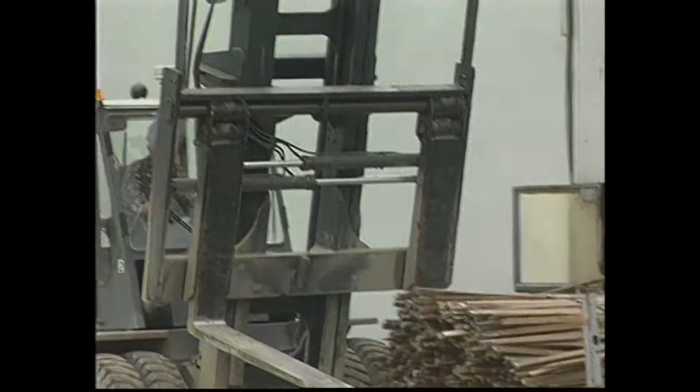Lift truck operators are just like millions of other professionals who earn their living by operating equipment or vehicles. It takes skill, training, and experience, realizing that no job on the ground or in the air can be done at the expense of safety.

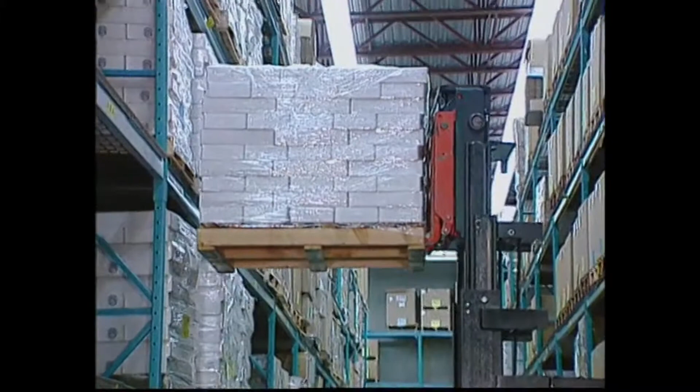Remember, you're working on a piece of machinery that weighs about 9,000 pounds. With a load, it increases up to 14,000 pounds. That's equivalent to 6 cars. Lift truck operators have a difficult job. They lift heavy loads and they maneuver in tight spaces.

Safety isn't something anyone sets out to ignore, but tight schedules, heavy equipment, pedestrian traffic, and congested workspace can compromise safety any hour, any minute, any time. Unfortunately, accidents can happen, but accidents happen more and cost more than we realize.

Between lost time, increased insurance premiums, and litigation, it's common for accidents to cost a company over $1 million. Some companies cannot survive the aftermath and close their doors permanently. Then there is personal injury. Let's not forget the family, especially the children. One accident can cost a child a lifetime of happy memories.

But we can improve safety with the right training and the right rules. Government studies have shown effective training programs improve lift truck operators' safety performance by as much as 70%. OSHA, the Occupational Safety and Health Administration, estimates that there are 68,000 accidents every year in the U.S. involving lift trucks. Of those, over 100 people are killed.

Here's how the accidents break down in terms of causes. 25.3% tip over. 18.8% personnel are struck by a powered industrial truck. 14.4% personnel are struck by a falling load. 12.2% employee falls off elevated forks. 7% the lift truck runs off a loading dock or other surface. And 6.1% the lift truck is improperly maintained.

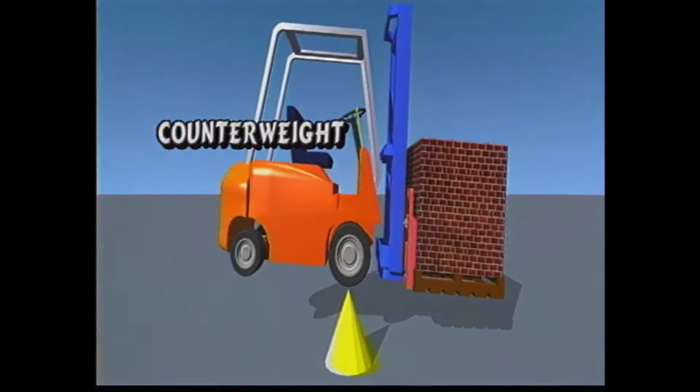The heavy counterweight on the back keeps the rear wheels on the ground. As you can see from this diagram, the front wheels act as a fulcrum between the counterweight and the load, just like the pivot point of a teeter-totter. It's the same principle of leverage that allows a young child to lift her mother.

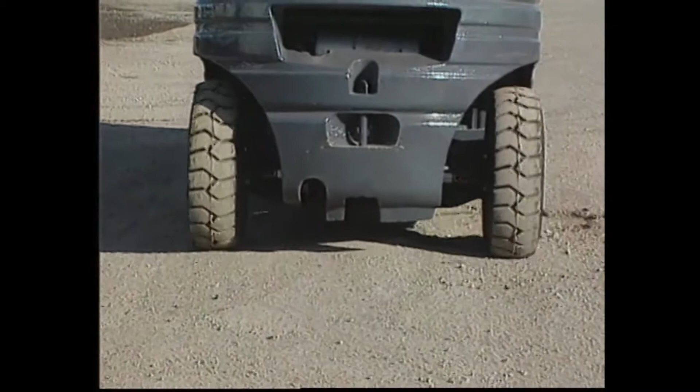A typical counterbalance lift truck has a three-point suspension system. The rear axle pivots at a single point in the center of the axle to compensate for uneven floors. This forms the stability triangle base. With the added dimensions of lift height, it forms a three-dimensional triangle similar to a pyramid.

When the combined center of gravity stays within the triangle, the truck is stable. Move the center of gravity forward of the triangle, as when a load is too heavy or too high, the truck will tip forward. This is called longitudinal stability.

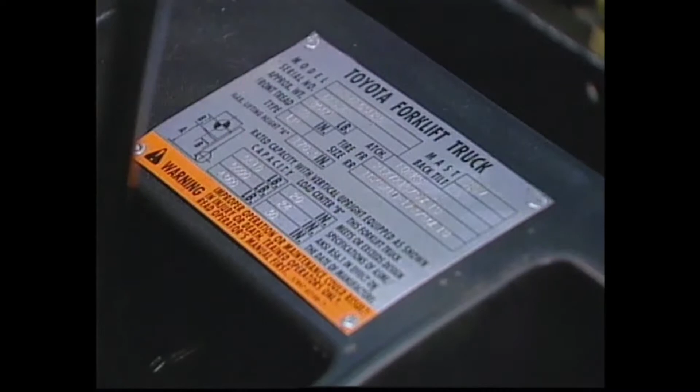Now, a truck must have a nameplate. This shows the maximum weight it is allowed to lift. This truck can lift 5,000 pounds, based on the load having a 24-inch load center. The load center is the distance from the face of the forks to the center of gravity of the load.

In this example, this 5,000-pound truck with a 24-inch load center will attempt to lift this 5,000-pound load. However, because of the unusual shape of the load, the center of gravity of the load is 30 inches from the face of the forks. Notice how the rear wheels lift off the ground when the capacity of the truck is exceeded.

Now, if the truck lifts the load from the opposite side, the center of gravity of the load is only 18 inches from the face of the forks. This load can now be safely lifted. The nameplate will also show the maximum lifting height. The higher the lift, the lower the capacity.

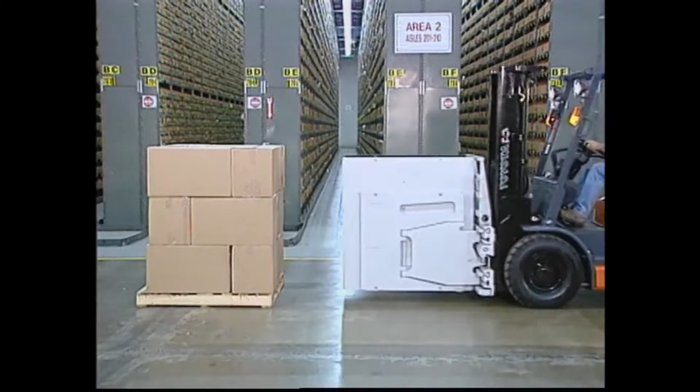Attachments such as this carton clamp actually reduce the capacity in two ways. First, the carton clamp moves the load away from the operator, reducing load capacity. Secondly, the weight of the clamp will further reduce load capacity. This 4,000-pound truck will now be rated or limited to lifting a load of 2,500 pounds or less.

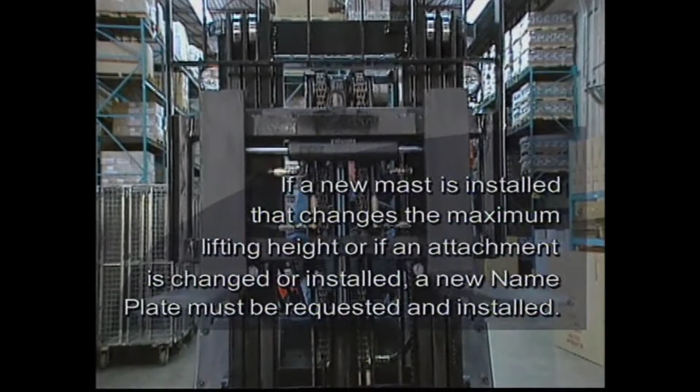If a new mast is installed that changes the maximum lifting height, or if an attachment is changed or installed, a new nameplate must be requested and installed. Over 1/4 of all lift truck fatalities occur when a lift truck tips over. Understanding the principle of lateral stability will reduce the chance of your truck falling sideways.

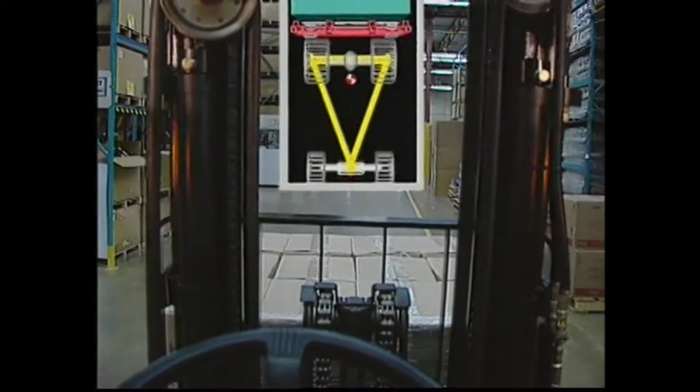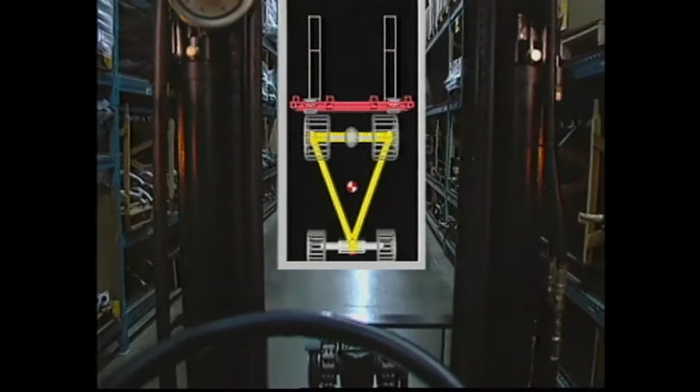What do you think? Is a lift truck more stable with a load or without a load while turning? As this lift truck turns with a load, the combined center of gravity moves towards the edge of the triangle. Now, notice what happens when we complete a similar turn, this time without a load. Notice the center of gravity is much closer to the edge of the triangle. The closer it is, the less it takes for the truck to become unbalanced and tip over. This is why an unloaded truck should be operated just as carefully while cornering.

Let's look at some causes of tip-overs. Sharp turns, raised masts, unstable loads, potholes, uneven surfaces, wet surfaces, and driving on ramps, to name a few. On October 17, 1994, Scott was operating a lift truck outside. He was attempting to pick up a load of empty pallets. While making a sharp turn, he hit a small pothole.

Scott was fortunate. He had been properly trained. He knew how to best survive a tip-over situation. First of all, Scott was wearing a seatbelt. When the lift truck tipped, he stayed inside the operator compartment, his best chance for survival. He braced his feet and held on tight to the steering wheel with both hands while leaning in the opposite direction of the fall. Scott was able to escape with minor injuries.

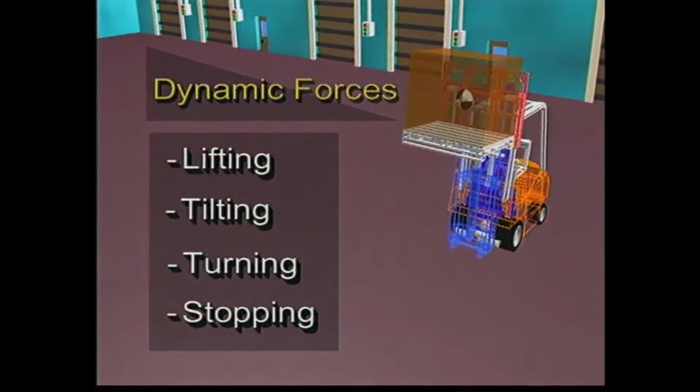Never attempt to jump out of your lift truck if you encounter a tip-over. Had Scott tried to jump clear of the truck, the overhead guard would have struck him, crushing him to death. When a lift truck is in motion, the dynamic forces such as lifting, tilting, turning, and stopping can cause the combined center of gravity to move outside the stability triangle, causing the lift truck to tip over.

When operating a Class 1 stand-up lift truck, operators must be aware of the causes that result in a tip-over situation. These are overloading, traveling with elevated loads, braking or accelerating sharply while turning, handling off-center loads, traveling at excessive speeds, falling from docks, dock plates, and trucks and trailers, to name a few.

With a counterbalance lift truck, the operator is instructed to stay with the truck when it tips over. Stand-up lift trucks are different. In the event your stand-up lift truck is involved in a tip-over or off-the-dock accident, you can be severely injured or killed. To minimize your risk of injury, it is recommended that you step off the rear of and away from your stand-up truck. Safety authorities such as OSHA state, when a stand-up rider tips over laterally, the operator must be trained to step off the vehicle toward the rear of the vehicle.

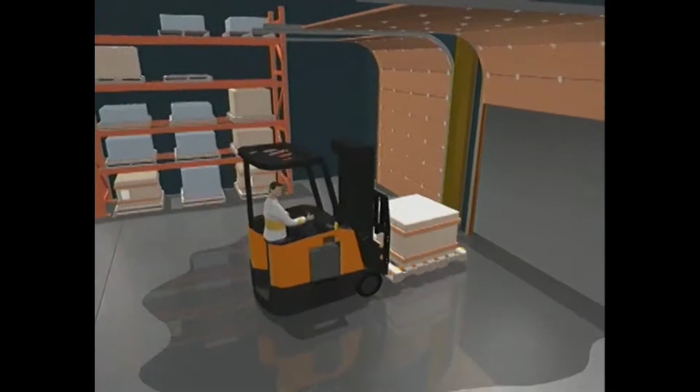In this example, the truck is turning a corner too fast with the load raised. As the truck begins to tip, the operator senses this emergency situation and steps out of the operator compartment. In this next situation, the truck is approaching the loading dock too quickly and slides on a wet surface. Unable to stop, the truck continues over the edge. The operator senses this emergency situation and steps out of the operator compartment.

Use slow and gentle maneuvers when operating a lift truck. This will keep the combined center of gravity inside the stability triangle and all of your wheels on the ground. Keep your balance. Your life depends on it.

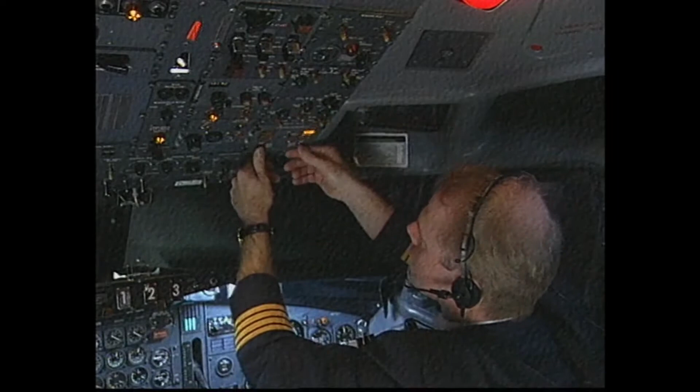When you put your life in the hands of professionals, you do not want them to cut corners. Pilots, for example, use a checklist to do a pre-flight inspection before every flight. 99 times out of 100, everything checks out okay. But it is the pre-flight inspection that contributes greatly to safe air travel.

It's the operator's responsibility to inspect the lift truck before the beginning of each shift and keep a written record. At times, this task may seem unimportant. However, 6.1% of accidents are caused by improper maintenance procedures. The objective of the inspection is to look for damage and to make sure the truck is in safe operating condition and meets the manufacturer's specifications.

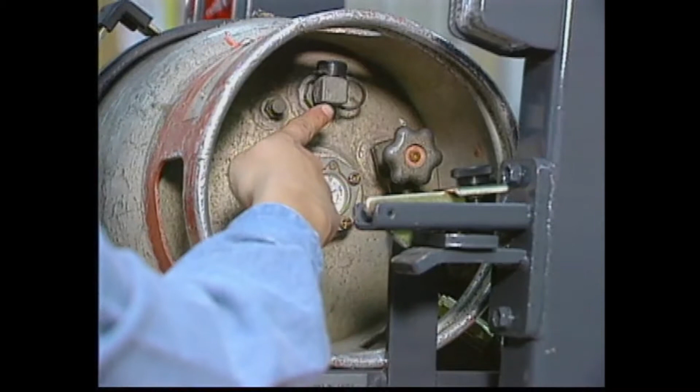A good place to begin an inspection is at the fuel source. In the case of an electric truck, start at the battery. With a propane truck, begin with the liquid propane cylinder. Make sure the locating pin is in place and the pressure relief valve is pointing upwards. Check the fuel level. Don't take a chance on running out where it is dangerous to refuel.

Check the connectors and hoses. Then listen, smell, and look for leaks. Frosting will indicate even the smallest leak. Be careful. Touching this with your bare hands can cause a serious frost burn. Check the cylinder tie-down latches to make sure the propane cylinder is secure.

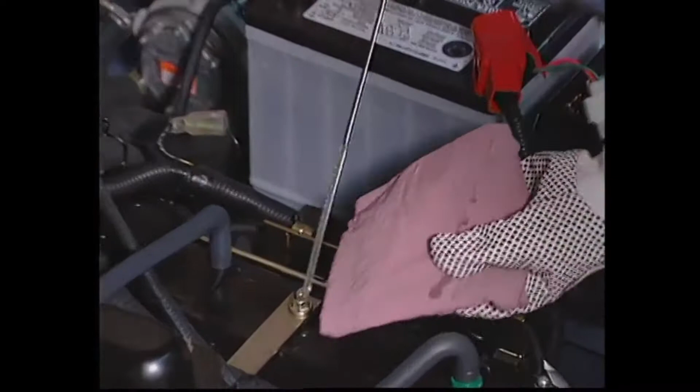Open up the engine cover and inspect the engine compartment and fluid levels. Check the battery, the engine oil, transmission fluid, the fan belts and hoses. It's important that they are not frayed or worn.

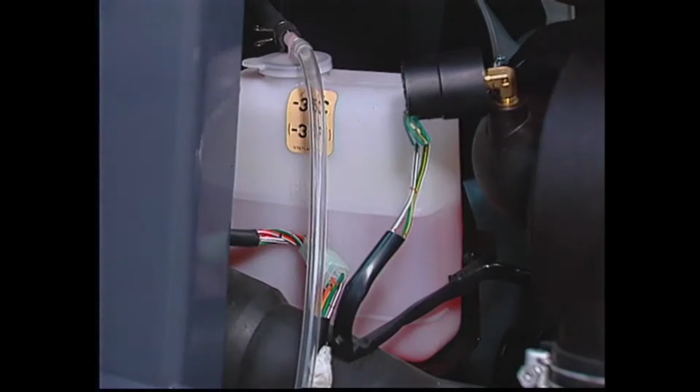Check the brake fluid reservoir, hydraulic oil level, the radiator coolant, and finally, inspect the air filter. A dirty filter can increase harmful or poisonous exhaust gases. Close the engine cover and secure the propane cylinder.

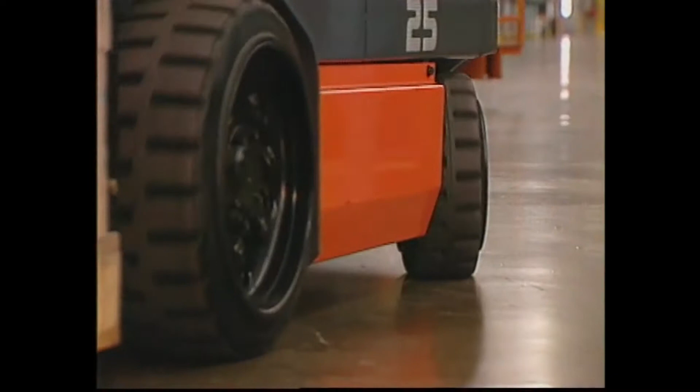Next, inspect the tires and wheels on the right side of the truck. Ensure the overhead guard is in good shape. Are the lug bolts present and tight to the touch? If not, call for repairs. Loose or missing lug bolts can cause damage to the truck or injure someone. Remember, do not operate the lift truck until repairs are made.

Are there chunks of tire missing? Cuts or objects embedded in the tires? How about wire, plastic strapping, string or foreign objects lodged in behind the wheel? These can cause costly damage or serious injury.

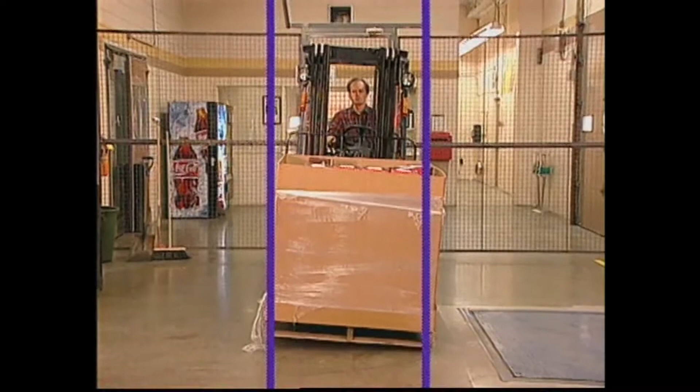If you're inspecting a truck with pneumatic tires, check the air pressure as outlined in the operator's manual. An underinflated tire will lean the truck to one side and will decrease stability. Notice that when the load is being lifted, it is actually moving away from the center of the truck. It wouldn't take too much to tip this truck over.

Examine the mast and forks. The forks must be level. Look for excessive wear or cracks in the hanger welding or in the heel. The forks must be evenly spaced and the fork pins locked into place. Equal tension in the lift chains is important. This will prevent uneven lifting. Verify that the chain is well lubricated.

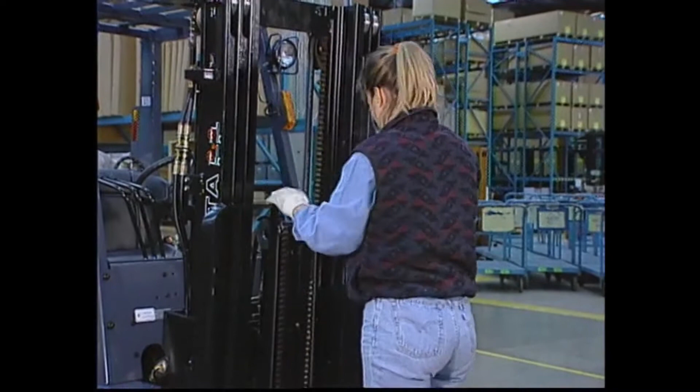Inspect the hydraulic tilt cylinders and lift cylinders. They must be free from leaking hydraulic fluid. Inspect the hoses around the mast. This is where leaks often start. Make sure the mast channel is free of foreign objects, such as pieces of wood or wire. Complete a thorough examination of the wheels and tires on the left side of the truck.

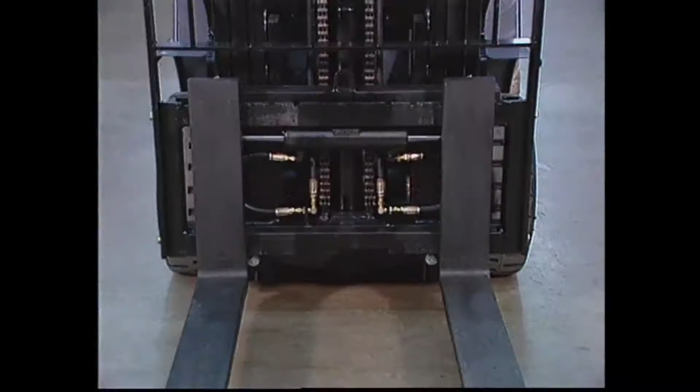To start the engine, make sure the parking brake is on. Listen for any unusual noises as the engine warms up. Pull the lift lever and fully raise and lower the forks to ensure free movement of the mast. Once the forks have been lowered, test the side shifter or any attachments if installed. Tilt the mast back and forth, making sure all hydraulic movements are smooth and operational.

Release the parking brake and drive forward or reverse about 20 feet in total, ensuring the steering and brakes are working properly. Check the brakes. The brake pedal must not reach the floorboard. If it does, the brakes are not functioning properly and the truck should be taken out of operation until repaired.

When finished, turn off the engine and apply the parking brake. Look under the truck to check for any oil leaks. Oil patches can cause serious injury to pedestrians. Next, inspect the horn, lights, and gauges. Observe pedestrian warnings and any other electrical systems your truck might have.

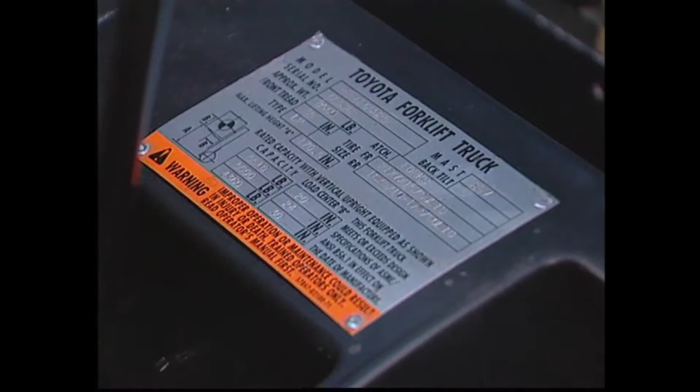A lift truck cannot be put into service until it has a legible manufacturer's nameplate securely fastened. Make sure the seat belt is not frayed or torn and that it latches properly. All safety labels and instructions must be in place and readable. The overhead guard and load backrest extension are important safety features. Make sure they are in place and secure.

Finally, complete and file an operator checklist and report any defects to your supervisor in writing. If you're on the job and notice that your truck is unsafe to operate, park it and tag it out of operation. Report specific problems to your supervisor. Remember, failure to do this could cause injury to yourself and to the employees working around you.

Rules of the road. If you decide to ignore them, you endanger your life and the lives of others. There are federal laws that have established rules for lift trucks. OSHA requires that you be trained and authorized by your employer to use a specific lift truck.

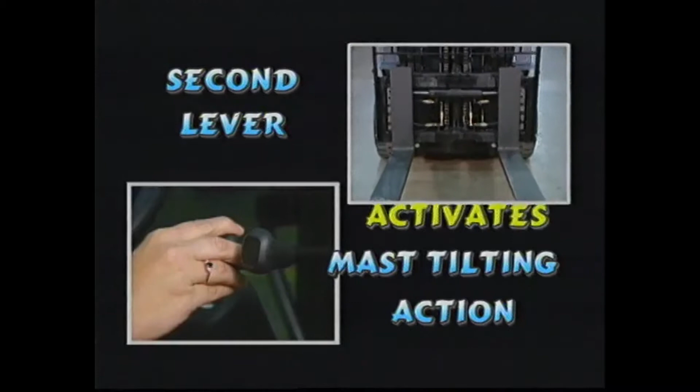Lift trucks have similar controls as cars do: a steering wheel, accelerator pedal, foot brake, parking brake, and key switch. In addition, lift trucks have a directional control lever and hydraulic control levers. On most trucks, the first lever activates the lift and lower control of the forks and mast. The second activates the mast tilting action. The third works as an auxiliary function for an attachment such as a side shifter or a clamp. Remember, using attachments requires specialized training.

Lift trucks need to be highly maneuverable to work in tight places. That's why they steer from the rear. Watch out for tail swing when traveling forward. When cornering, keep the front wheels close to the inside aisle and start turning. This allows room for the rear end to swing out in the opposite direction.

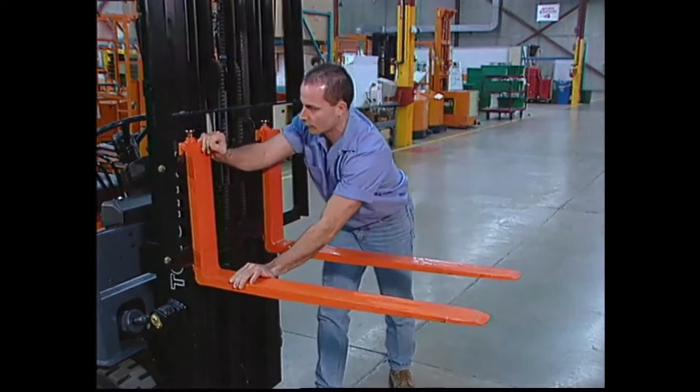Before you pick up a load, make sure your forks are spread as far apart as possible and are long enough to stabilize the load. And remember that the forks must be at least 2/3 of the length of the load to keep it balanced. If the load is over your lift truck's capacity, it must be broken down into smaller loads or use another truck with the proper capacity.

While traveling, make accelerating, braking, and turning a smooth and fluid motion. This will minimize the chance of the load falling off the forks. Keep in mind that 14% of all fatalities involve someone being hit by a falling load. Loads must be stable before you move them. Never reach through the mast to reposition a box. Instead, get off the truck. Make sure the load is against the load backrest extension with the mast slightly tilted back. The pallet should be no more than 4 inches off the ground while traveling.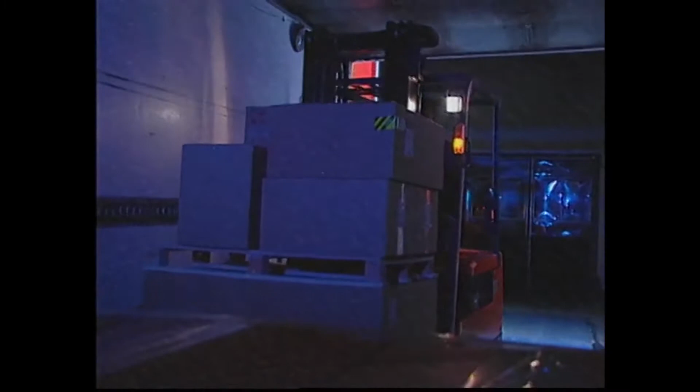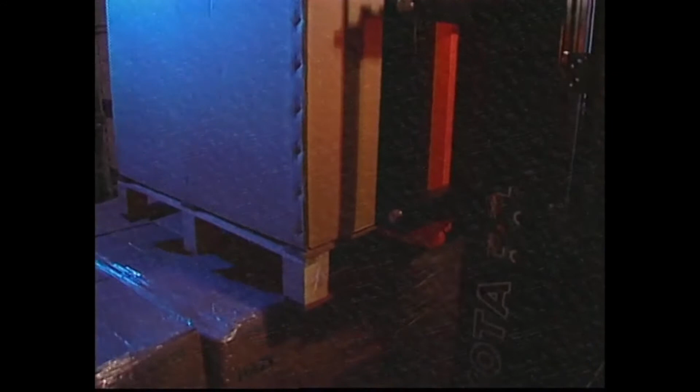On September 21st, 1995, a 31-year-old man was loading a trailer. A box fell off the top of a pallet and onto the floor. The operator put the truck in neutral and went to pick up the box. He did not engage the parking brake. He was pronounced dead at the scene. Cause of death: suffocation.

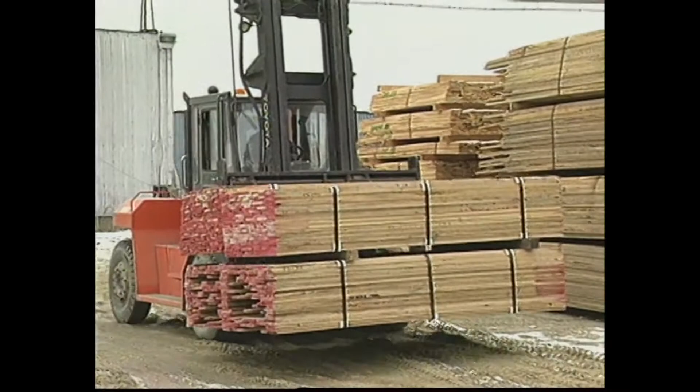Bumps, rough or uneven surfaces, and debris demand your full attention. These can upset your load or unbalance your lift truck. Drive with extra caution when in these environments. If you are carrying a large load that blocks your view, travel carefully in reverse. Use all of your field of view to guide yourself. Wet floors can be a real hazard. Braking and steering can become greatly reduced or non-existent. Drive slowly on wet surfaces.

Before lifting, you should do a quick mental check to question things such as the weight of the load. Is the load stacked securely? And will it fit in the rack? Remember, only raise the load when you have come to a complete stop and are in good position for the lift. Make sure the path is clear and tell anyone nearby to stand back because you will be lifting.

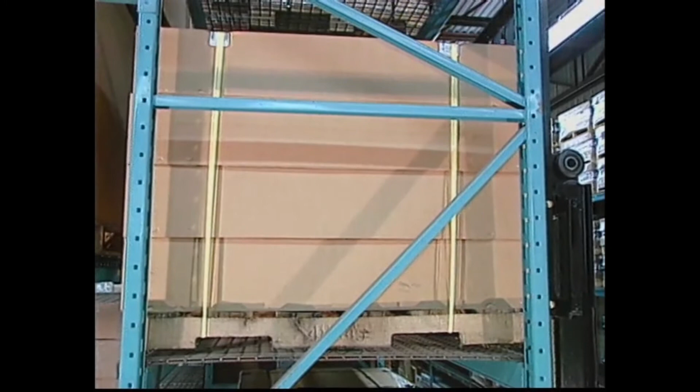Once the load is in position, tilt the mast so that the pallet is level and slowly lower the pallet until it rests on the rack. When the forks are clear, lower them while remaining at a complete stop. Some operators think it's okay to lift and lower the load while they are traveling. Wrong. The lift truck must be completely stopped. Watch out for overhead hazards such as sprinklers, heating systems, and low-hanging doorways.

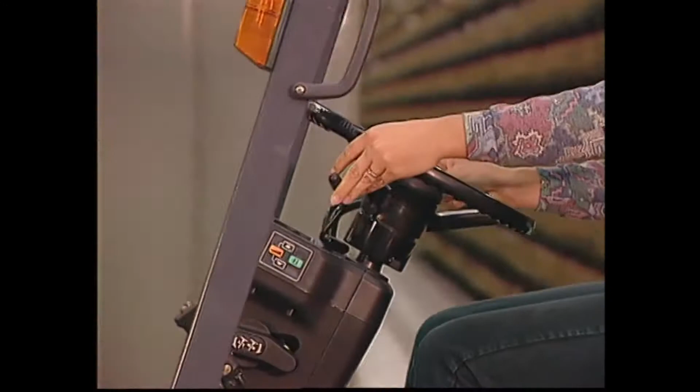Electric trucks can also brake by changing the direction of the forward-reverse control lever. This is called plugging. It's a common way to stop the truck, although the foot brake is quicker and more dependable.

Remember to stay inside of the driver's compartment at all times. Do not place your hands or feet on or outside of the overhead guard. This is a bad habit that causes many serious injuries.

When crossing railway tracks in a lift truck, angle your truck and proceed slowly. Cross the tracks one wheel at a time to stay in balance. Crossing railway tracks directly will make your truck unstable. All floors and elevators have weight restrictions. Remember to combine the weight of the truck and the load to determine the total weight.

For travel on ramps, the load must always be uphill, so back down ramps with a load, and drive forward up a ramp with a load. If the load blocks your view, ask someone to direct you. Remember, never turn on an incline since the truck has a greater chance of tipping sideways. The forks must only be raised enough to clear the grade.

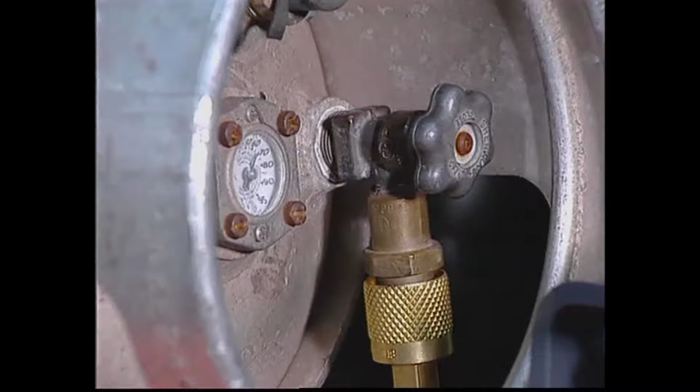When you are finished using the truck, park it in a designated area and remember to turn off the key. Never park in a fire lane or block a doorway. Lower the forks so that they are flat on the ground. Put the controls in neutral with the parking brake on. Turn off the valve on the propane cylinder to prevent a fuel leak. Disconnect the battery connectors if using an electric power truck.

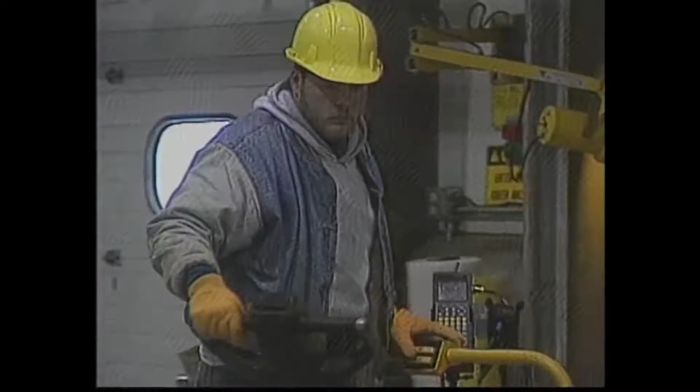A common cause of trailer separation accidents is early departure. This is where a tractor-trailer driver assumes loading or unloading is complete and pulls away from the dock while the lift truck is entering or leaving the trailer. If the lift truck does not have enough time to stop, it can fall off the dock or trailer. Even if wheel chocks are still in place, they offer little protection if the tractor-trailer driver leaves before it is safe.

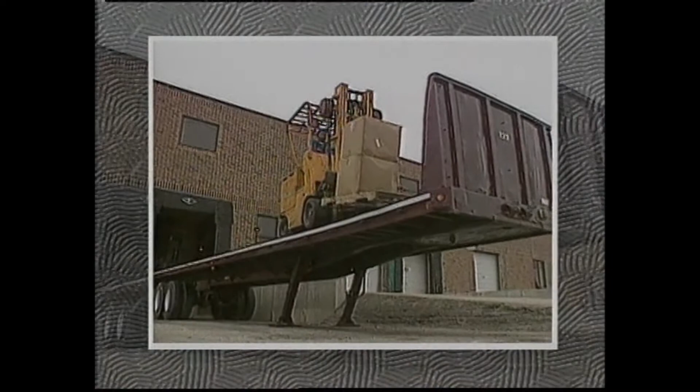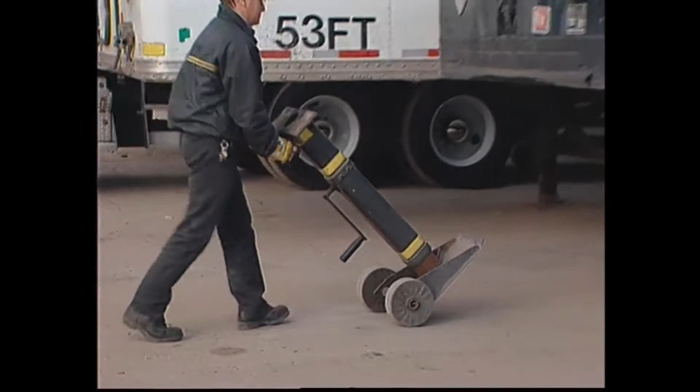Landing gear collapse is another safety hazard. When the tractor has been removed from the trailer, certain safety precautions must be taken. If the landing gear is weak or corroded, it may collapse due to the weight and forward motion of the forklift entering the trailer. Trailer upending is another hazard caused by the heavy loads being placed in the nose of the trailer that exceeds the counterbalance effect of the trailer's rear axle. Therefore, uncoupled trailers must be secured with a support jack before entering with a lift truck.

The most common form of trailer separation is trailer creep. As the lift truck travels on and off the trailer, its momentum inches the trailer away from the dock. To demonstrate this, the wheel chocks have been removed and the brakes released from this tractor trailer. As this moving lift truck stops, its weight forces the entire rig to move away from the dock. This is why the tractor trailer must be safely secured against the dock. Tractor trailer brakes must be engaged and wheel chocks must be properly installed. However, wheel chocks have their limitations and could fail if placed on ice, gravel, or sand.

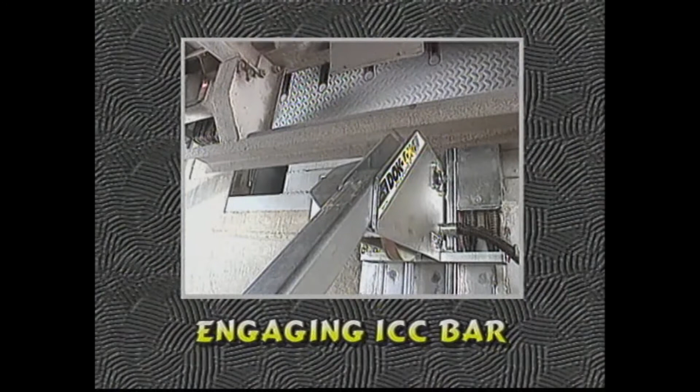For increased protection against these types of accidents, many companies have installed vehicle restraints that either hold the trailer firmly against the dock by engaging the trailer's ICC bar or by locking the trailer rear wheels with dual steel barriers. Lift truck operators are responsible to ensure the trailer is ready for safe loading or unloading. Once the tractor trailer is secure, carefully position the dock leveler in place. Make sure there is proper lighting. Poor lighting increases the chance for injury and/or product damage. The floor of the trailer must be inspected to ensure it is in good condition, and the combined weight of the lift truck and load do not exceed the maximum weight capacity of the trailer.

When backing out, stop at the end of the trailer and look both ways for pedestrians. Accidents on the dock happen every day. By knowing the safety hazards in this area, you can make the loading dock area a safe place to work.

Pedestrians are involved in about 40% of all lift truck accidents. 18% of them are fatal. On August 8, 1993, a man was taking inventory in a warehouse. A lift truck carrying a load of boxed metal parts was stacking a load. While backing out, his forks caught the pallet and it fell.

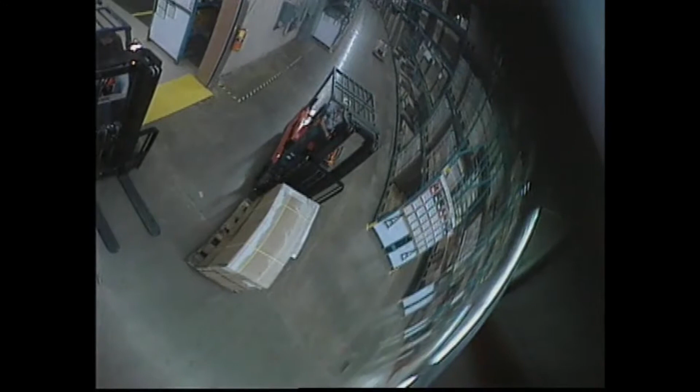Make sure before you move your truck, the path is clear of anyone or anything. Slow down when approaching blind corners. Use your horn. Stop at intersections, always giving pedestrians the right of way. Use aisleway mirrors to make sure the path is clear. Look behind you before backing up. And don't rely on lift truck mirrors. You can see much more by turning to look.

Often, pedestrians will ask for a ride. Lift trucks are strictly designed for one person, the operator. No riders ever. Never lift a person using a lift truck while they are standing on the forks or a pallet. A percentage of fatalities related to lift trucks involve someone using a lift truck as an elevator.

These are just a few of the many safety rules that must be obeyed to ensure a safe workplace. However, every place needs their own set of special safety rules. Your employer should have his own list. Practice driving safely, because safety is no accident.

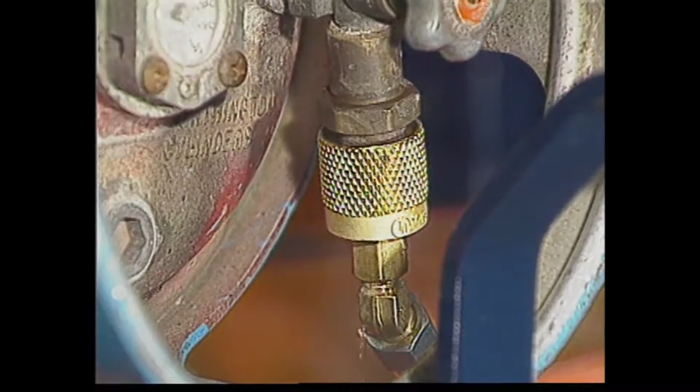Liquid propane gas is a popular fuel for many uses. When handled properly, it's safe. When handled improperly, it can cause serious injury or death. Don't let this happen to you. Liquid propane gas is a liquid that normally boils at minus 44 degrees Fahrenheit. But when stored in a high-pressure cylinder and compressed 270 times, it stays liquid at room temperature. If released, the expanding gas can cause a serious frost burn when it comes in contact with unprotected skin. For this reason, eye protection and heavy gloves should always be used when handling liquid propane gas.

Liquid propane gas is heavier than air and will travel along the ground like water. Escaping liquid propane gas can be extremely dangerous if it is allowed to move to a low area where it can collect and ignite. Here's how to minimize the chance of liquid propane gas leaking while changing the cylinder. These procedures must be followed.

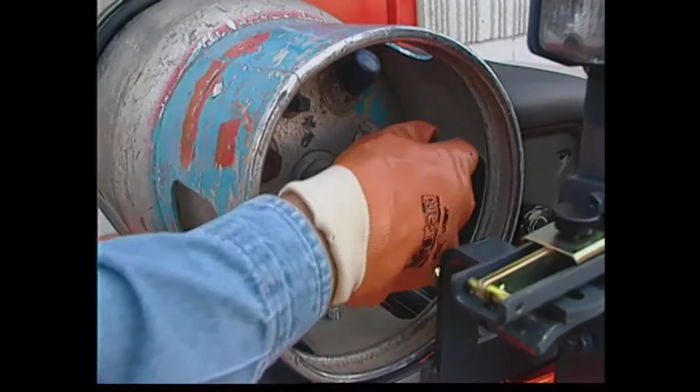Start by parking the lift truck. Set the parking brake. Lower the forks. Place the transmission in neutral and leave the motor running. Put on your protective safety gear. Then, turn off the valve on the liquid propane gas cylinder and allow the truck to stall due to lack of fuel. This reduces the pressure of the gas in the fuel lines. Next, turn off the ignition and then try to restart the motor. If the truck will not start, you may proceed.

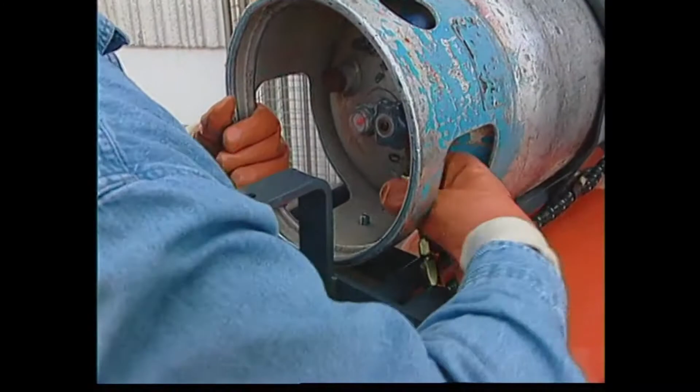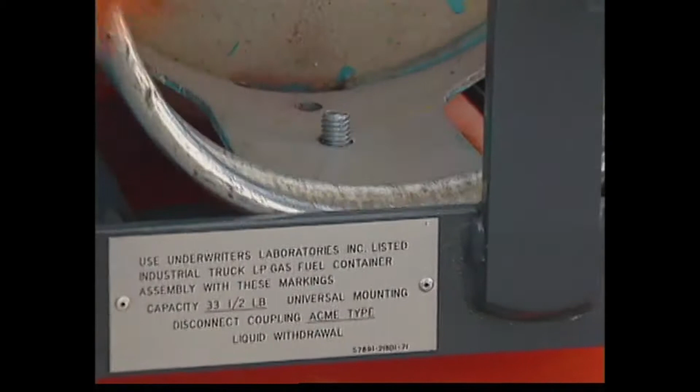First, uncouple the hose from the valve. Remove the cylinder and store it outside in a safe and approved method. When installing the full liquid propane gas cylinder, handle it with care. The liquid propane gas is under high pressure. Check the new cylinder for proper seals and gaskets. Don't risk leaks with a bad O-ring. Now, place the cylinder on the locating pin and set it in the liquid propane gas tank bracket. Remember, the pressure relief valve always points upwards.

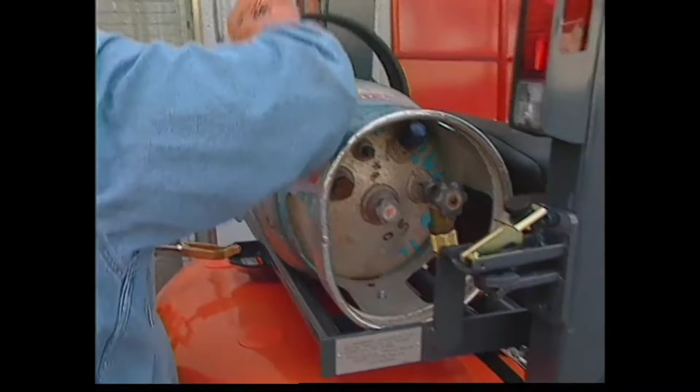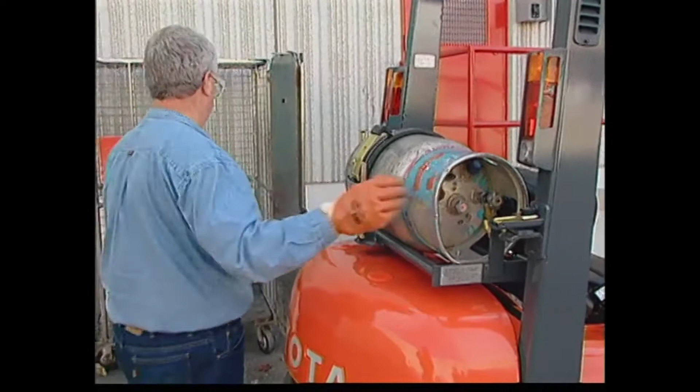Secure the cylinder with the bracket restraints. Open the valve slowly. Look, listen, and smell for leaks. Frost on a fitting is a sure sign of a dangerous leak. Ensure that the cylinder is secure. Now you're ready to go.

For diesel or gasoline refueling, drive the lift truck close to the pump and turn off the truck. Open the gas cap and feed the nozzle into the tank opening. Turn on the pump and proceed to fill the tank. Do not fill the tank completely. This will minimize the chance of fuel spilling out while driving.

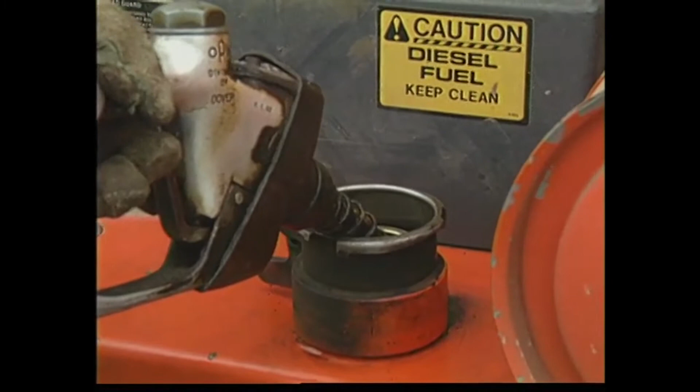When finished, replace the cap and clean up any overspill with a cloth. Finally, start your truck and proceed with your work in a safe manner.

In many ways, industrial batteries are like young infants. They need to be changed and cleaned regularly. If they become too tired, they start to act up. They constantly need to be replenished with water. But given too much, they'll spit up all over. If you take care of your battery, it will last for many years. Ignore it, and you will have problems.

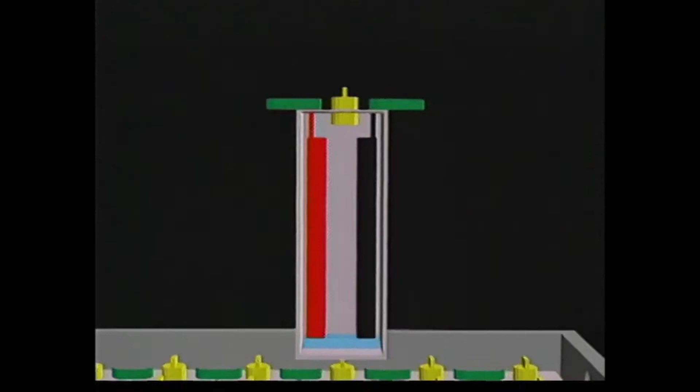The typical industrial battery is really a series of individual cells joined together by lead connectors. Each cell has a positive post and a negative post. The cell is filled with a solution of sulfuric acid and water called electrolyte. Each cell generates approximately 2 volts of electricity.

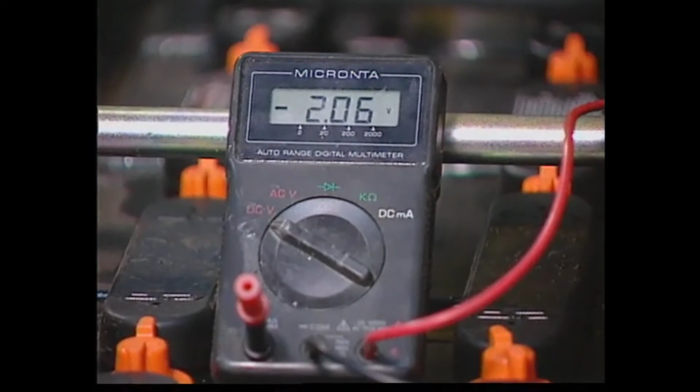When it's time to recharge the battery, park the lift truck with the emergency brake on. It is best to recharge the battery when it's out of the truck. But if that's not possible, fully open the battery compartment to allow heat and hydrogen gas to escape. Hydrogen is a highly flammable gas, and for this reason, batteries must only be charged in well-ventilated areas. No smoking or open flames are permitted.

Unplug the battery connector from the truck and attach the charger connector to the battery, never to the truck. Check the cables for wear and the connectors for damage. Turn on the charger following the manufacturer's instructions. When the charging process is complete, always turn the charger off before unplugging the connectors.

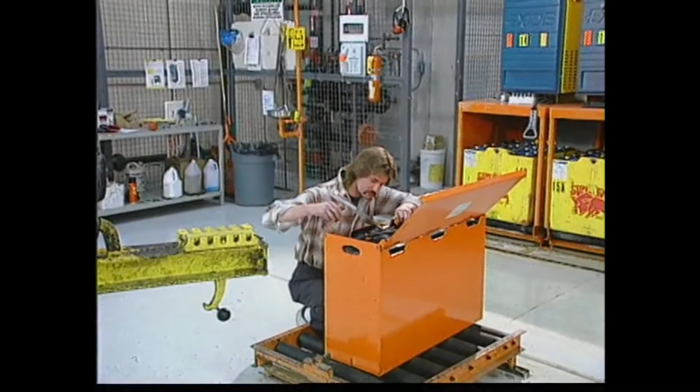In March of 1995, a newly trained operator was testing the electrolyte with a hydrometer. He was not wearing any face protection. He squeezed the hydrometer too hard. This caused the electrolyte to spray up on his face. He immediately went to an eye wash station. Luckily, he was trained on what to do if he came in contact with acid and suffered no injuries.

You should always wear protective equipment when you're anywhere near battery acid. Gloves, goggles, and a face shield are mandatory. Have an eye wash station nearby. If acid gets into your eyes, go immediately to the eye wash station and run water over the affected area.

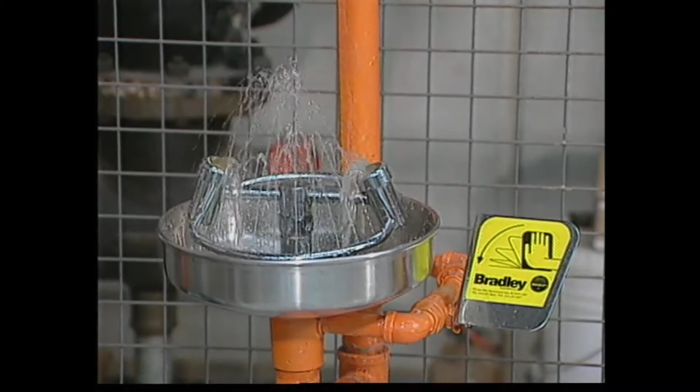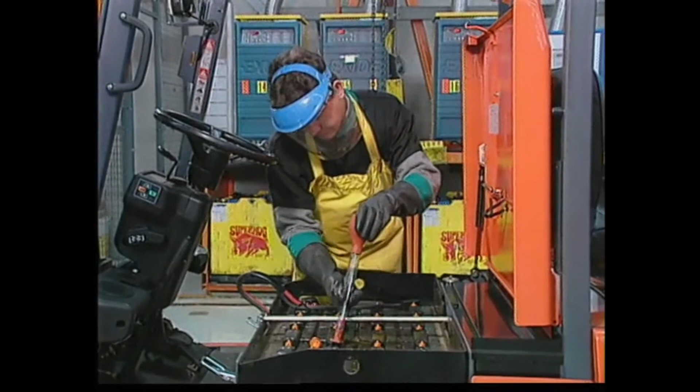Then, get medical attention. After charging, remove the caps of 3 or 4 cells to determine the electrolyte level. Only a flashlight can be used to look into the cells. When the battery is fully charged, the electrolyte has a high acid content. This can be tested with a hydrometer. By testing a small sample of electrolyte, you can determine how much energy is in a cell. This will also locate bad cells in a battery.

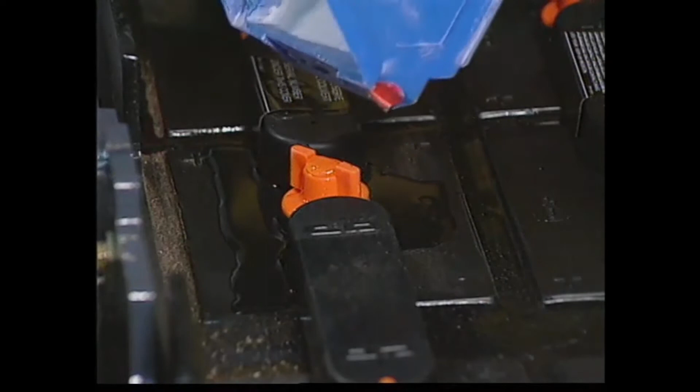To avoid acid spills, only add water after charging. Adding too much water before charging will cause overflow during charging and create a hazardous spill. If electrolyte does escape, it must be neutralized with baking soda and water.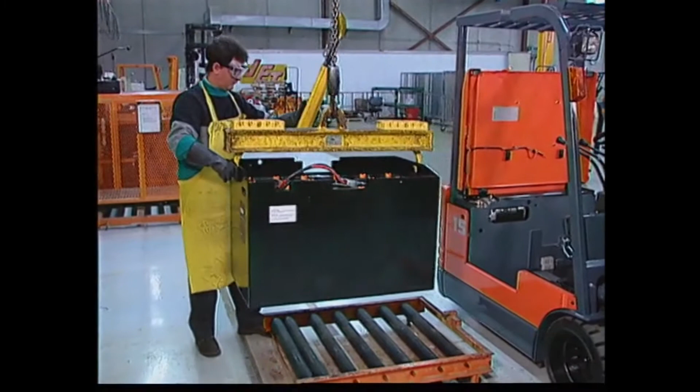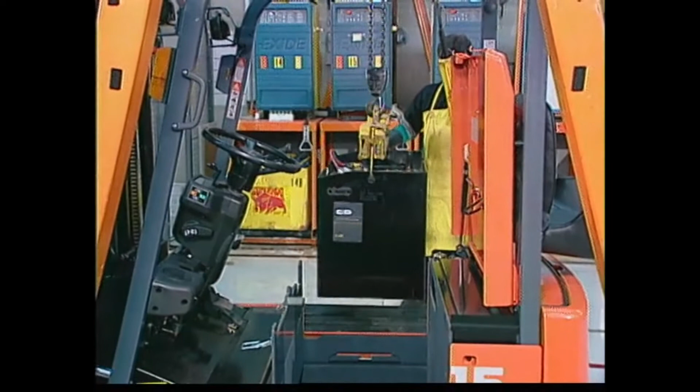Many people use a crane to remove the battery from a lift truck for maintenance. Carefully attach an approved insulated lifting beam to the battery and lift it out. Place it near the charger, then pick up the freshly charged battery. Be careful, the battery weighs thousands of pounds and can crush your hands or feet. Use only equipment designed for this purpose.

Electric trucks depend on the battery to balance their loads. Use a battery that is the proper weight and voltage. Check the lift truck's nameplate and compare it with the battery's weight and voltage as marked on the battery casing. Join the connectors and close the cover.

Some trucks use battery slides. Remove the safety gate and roll the battery out of the truck. In order to align the fresh battery to the battery compartment, connect extension cables. Then, drive the truck into position. Remove the extension cables and roll the fresh battery into the truck. Replace the safety gate, and then connect the battery cables.

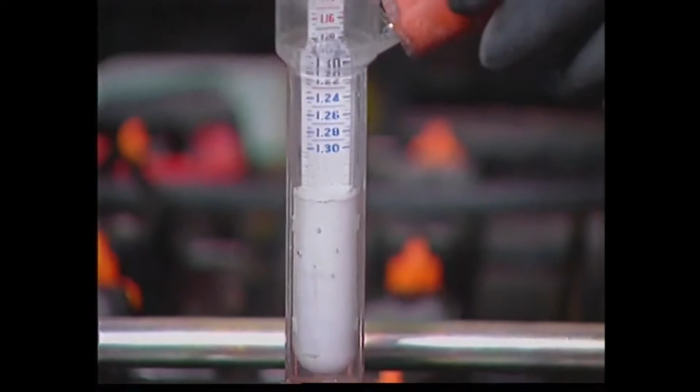Here are 10 tips on how to get the most out of your battery. Follow the manufacturer's instructions. The life of a battery and your lift truck controls can be severely shortened by not following the manufacturer's instructions on charging and maintaining the battery. Inspect the connectors. A loose, cracked, or pitted connection can cause arcing or sparking. Don't use the connector as a switch. Always shut off the charger when connecting or disconnecting the battery.

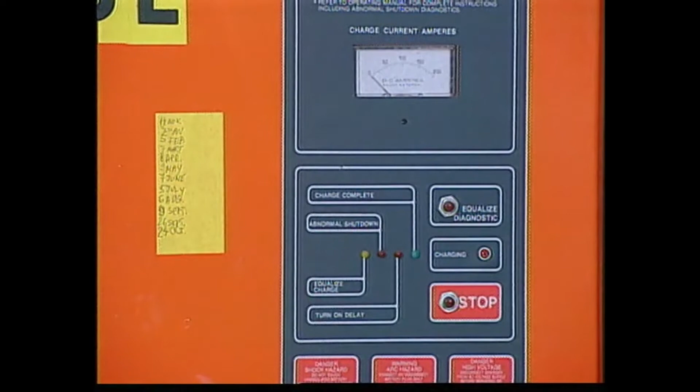Add water after charging. Charging increases the electrolyte levels in cells and can cause overflowing. Overflowing means a loss of electrolyte and damages your truck. Keep it clean. Batteries and their compartments should be kept clean and dry. If electrolyte is spilled on top of the battery, neutralize it immediately with a solution of baking soda and water. Always wear a face mask or goggles, rubber gloves, and a rubber apron when cleaning batteries.

Don't lay tools on top of the battery. Battery gases are explosive. Keep vent caps in place. Vent caps allow gas to escape and keep foreign objects from falling into the cell. Remove vent caps only to add water or to take hydrometer readings.

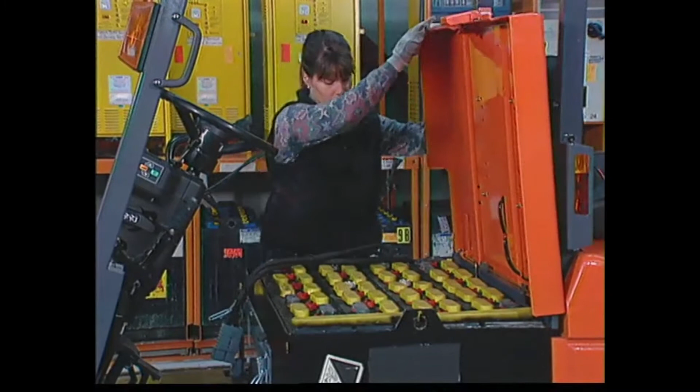Keep your battery cool. A normal charge can increase the temperature of a battery by 15 degrees or more. Operating hot batteries shortens their overall life. Allow the battery to cool down at least the same length of time that it was charged. Don't overcharge. No amount of overcharging can increase battery capacity, and it substantially shortens battery life.

No smoking, sparks, or open flames in the area. Charge in a well-ventilated room. If electrolyte gets in contact with your skin or eyes, rinse thoroughly with water for at least 10 minutes and get immediate medical attention.

Safe operation of a lift truck is knowing your equipment and following the rules of the road daily. Take pride in knowing that your performance affects you and your fellow workers. Your biggest job is ending your workday safely and returning to your family and friends. It's hard to play the game when you're injured. So learn to do your best so we can all get home safe!

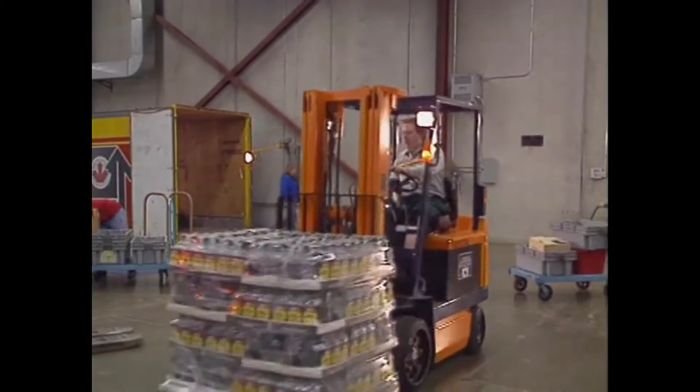The danger zone. When you have people working in close proximity with heavy equipment, the potential for serious accidents is very real, especially when you don't abide by the rules. One-third of all lift truck accidents involve a pedestrian being struck or run over by a lift truck. Many people think that because there are no stoplights, police, or street signs, that anything goes. And it's just the opposite. In fact, even greater care is needed because the environment is constantly changing.

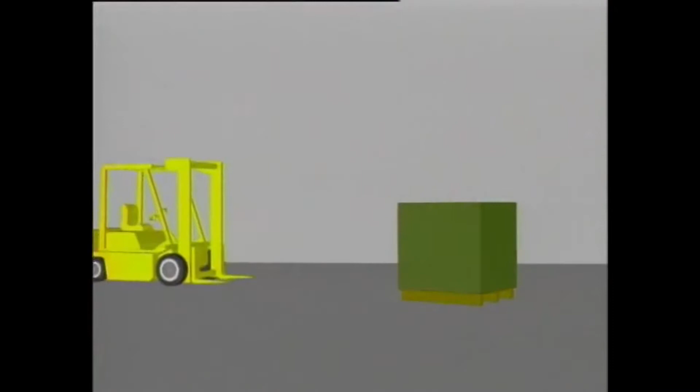Pedestrians and lift truck operators need to understand each other and how they can keep the flow of products moving without endangering each other in the process. Let's examine a lift truck and how it works. For example, this 5,000-pound capacity lift truck weighs over 12,000 pounds fully loaded. That is the equivalent to 5 cars.

Don't let their small size fool you. Lift trucks are built with a heavy counterweight at the back of the truck to offset the heavy loads that they can hoist high into the air. A slow-moving lift truck generates the same impact as a car traveling 30 miles per hour.

In order to maneuver in tight places, lift trucks are designed so that the back wheels do the steering. When a lift truck makes a turn, the end of the truck swings out in the opposite direction. One moment, the pedestrian may seem a safe distance away from you, but as the lift truck turns left, the rear end of the vehicle actually swings out to the right and moves closer to the pedestrian. Be careful that this doesn't happen to you. Always account for rear end swing.

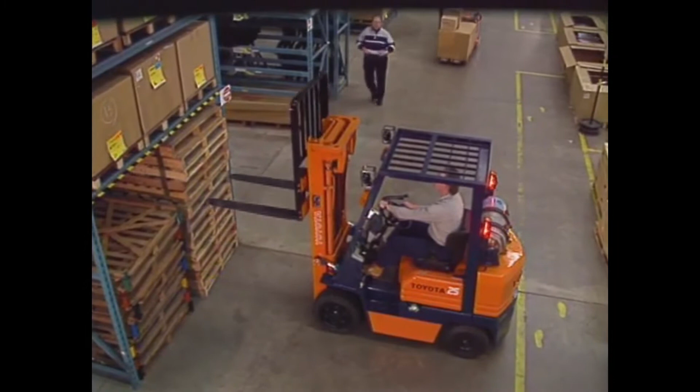Lift trucks have less than ideal visibility. When driving forward, the operator is looking through a steel mast which can obstruct his field of vision. A pedestrian could easily be lost from the operator's view. Engine-powered lift trucks are often noisy, and this restricts the operator's ability to communicate. Even when speaking loud, a lift truck operator may not be aware that you are close by. Then you have electric lift trucks that are just the opposite, very quiet. These are just as dangerous and can catch you by surprise.

While carrying a load, a lift truck may have to stop quickly. When this happens, the truck may stop safely, but the load may not. The load is usually unsecured and therefore unstable. So watch out that this doesn't happen to you. Never stand close to a lift truck.

It is the responsibility of the lift truck operator to ensure the safety of pedestrians. And it's equally important for pedestrians to be aware of their environment and the potential risks that exist in working in this environment. When a lift truck is putting a load in a racking system, it can sometimes take several minutes. In order to save time, pedestrians may find it faster to walk down the next aisle. Use extreme caution. It's difficult for a lift truck operator to see the entire working area, and it's possible that as a load is placed into the rack, part of a load may fall on the opposite side.

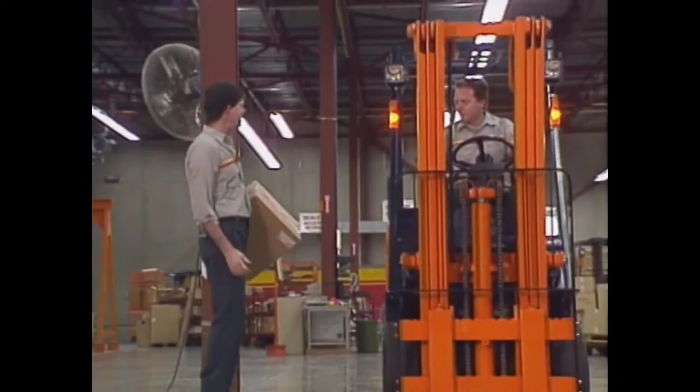Lift truck operators will gain better support of pedestrians if they are courteous when using the horn. Sound the horn from a distance and continue this until you gain their attention. If you're driving a lift truck, sound the horn whenever you lose visibility of an aisle. This will alert pedestrians and other lift truck operators that you are approaching and allow them to act in an appropriate manner.

Loading docks are a real hazard. They tend to become very busy and congested. It may take as many as 24 trips in and out of a trailer to complete a job. This fast pace and repetition puts added pressure on the operator.

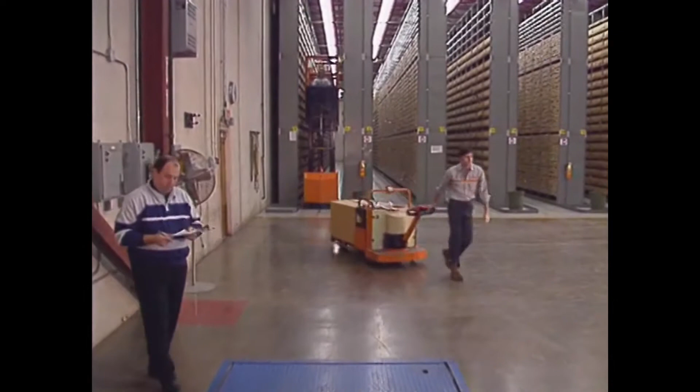Operators should stop each and every time they exit the trailer and look both ways to make sure that the area to be traveled is clear. Remember, conditions change very quickly in this environment.

Another area of concern is the loading dock itself. Because of wet conditions created by rain or snow, operators may have a difficult time both steering and stopping their lift trucks. You must take great care when working under these hazardous conditions.

These factors of extremely heavy weights, hard rubber tires, and unusual operating characteristics, combined with restricted visibility, require that pedestrians be extremely careful when working around lift trucks. Even safety shoes were never designed to protect you against this type of accident.

Over 10,000 pedestrians are injured in lift truck-related accidents each year in North America. In order to increase safety, rules of the road must be established. Let's review some of them shown in this video. Pedestrians should always look both ways before entering an aisleway.

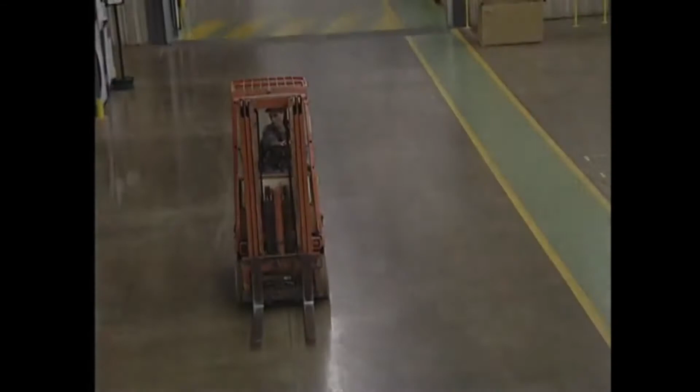What's Wrong with This is a video series that shows lift truck operators going about their daily routines. Your job is to carefully watch the examples and point out where they've made a mistake. Each operator commits 4 infractions. At the end of each presentation, you will be told what was done incorrectly and the proper operating procedure will be shown.

If you can catch what's wrong with each situation, then you know what the rules of safe operation are. If you miss 1 or more infractions, then make sure you remember the correct procedure and apply it to your day-to-day work. Now, let's begin with What's wrong with this?

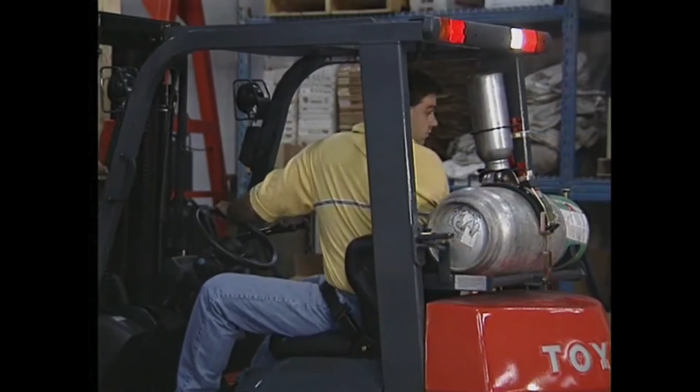Well, how did you do? What was wrong with what he did? Well, let's take a look. As he picks up this oversized load and backs up, he once again, like in the previous situation, fails to look behind the truck. Doing a complete 360-degree check of the area around your lift truck is the easiest and surest way of avoiding a collision with a pedestrian or other object.

For his second mistake, notice here how he turns around this corner with the oversized load and travels down the aisle. This is very dangerous. He should have a person to direct him around the corner and then down the aisle. While traveling with an oversized load, it may be advisable to travel in reverse so you can see where you are going.

For his third mistake, he once again fails to look behind him as he's backing up. Always check behind you and around your lift truck when moving, paying close attention to your blind spots.

And finally, his fourth error. Can you see what he did? He parked the lift truck on the dock plate and near the exit door. When parking your lift truck, you must always park in a designated area far away from any doorways, paths, or emergency exits. Always ensure that you disconnect the fuel or power source when leaving the lift truck for an extended period of time.

We'd like to thank you for viewing this video and hope that it has helped you to remember some of the rules you must follow to become a safe and professional operator.